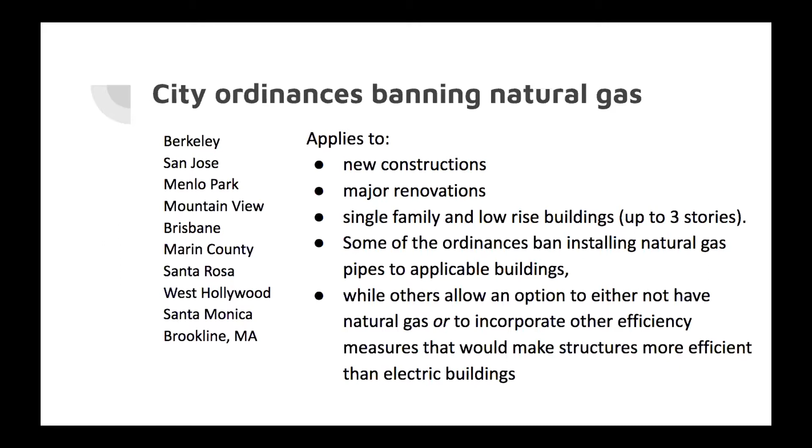So then looking at the challenges that these cities had when they were implementing their city ordinances, one challenge was restaurants, and just people enjoy their gas stoves. For a lot of people, cooking on a gas stove is really an important part of their home, or something that they cherish in their home.

And so while heating or cooking on gas stoves doesn't amount to a lot of greenhouse gas emissions in itself, there's a large fixed cost in setting up pipelines to new constructions. And once the fixed cost has already been paid for, it's cheaper to heat your house that way. And so even though stoves are a small part, it's turned out to be a large problem.

The California Restaurant Association sued the city of Berkeley, because Berkeley was one of the cities that had a ban on natural gas in new constructions, and the California Restaurant Association said that chefs wouldn't be able to make their specialties if they didn't have gas stoves, and a lot of people aren't ready to switch to electric stoves.

So that's one reason why perhaps a lower, more carbon-neutral alternative to natural gas might be better than switching to electric.

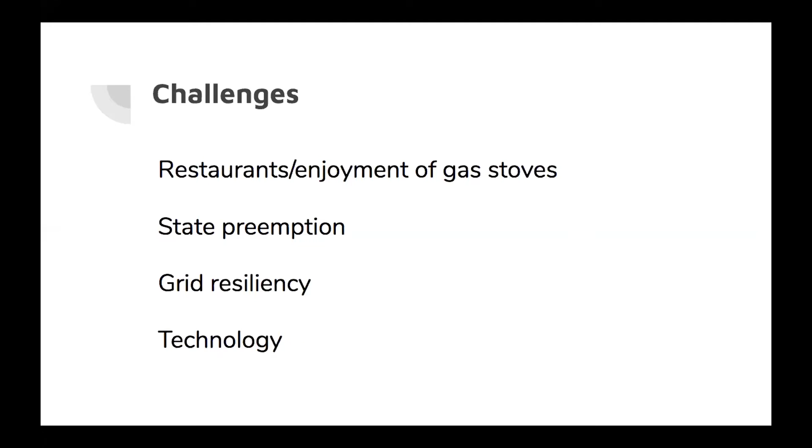So looking forward, those are the main challenges. And all 10 to 12 California cities have passed their ordinances and they haven't been challenged in court, so it seems like they are viable so far. And so the next question is, how can we advance these policies if our goal is to decarbonize by banning natural gas installations?

So one thing I think is pretty likely is these same 10 cities could expand these policies to include commercial and industrial buildings. And another option is these cities could expand these policies to include retrofitting old buildings or deconstructing pipelines that already go to old buildings. And I don't think that's as likely.

What these policies, I think, are trying to do is change the fleet of buildings for the next couple of decades, the next 50 years. And you don't have to spend money on deconstructing old buildings. That also means that there aren't stranded costs, which is something people get concerned with sometimes.

Another way that this policy could expand is if more cities ban natural gas. I also think that that's coming on the horizon. I forgot to mention, these 10 cities passed these policies last spring, and they came into effect in January 2020. So these are really new. I expect more cities will be banning natural gas and possibly on the horizon a state law, but that would be much in the future.

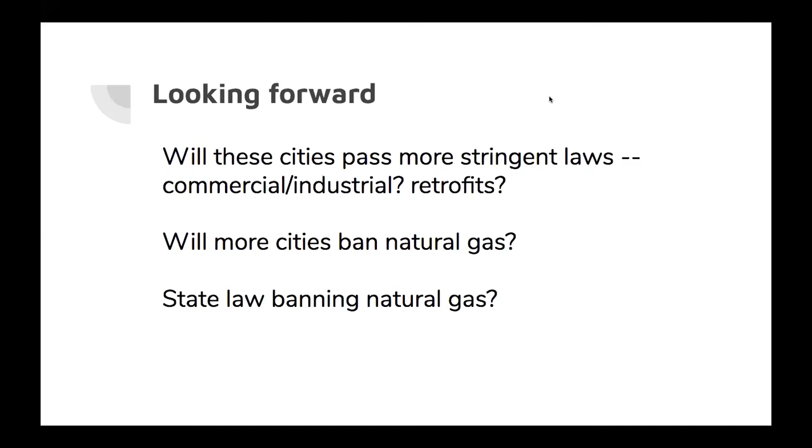So I think that's what I had planned to talk about. Does anyone have any questions now at this time?

So Rebecca, we have a question coming in from Greg, who's a graduate student here. It says the city of Davis does have a natural gas ban for new single-family residential buildings in place in the form of a REACH code, forcing mixed fuel buildings to be so efficient that it would not be cost effective compared to all electric. This went into effect in January 2020. So I think that's just adding to the list.

Oh, right. Yeah, I had not classified that as a ban on natural gas because it was a REACH code. But you could classify that as banning natural gas. I mean, I think there are about 20 or 30 that have REACH codes.

All right, any other questions for Rebecca? We can move on to Erfan, and if there's a question that pops up, we can head back to Rebecca at the end. Oh, we have another comment here. Teresa has a question, and I'll just go ahead and unmute her so she can ask that to you directly. Let's find her. Here you go, Teresa. All right, you're on. Yay, I get to talk. I thought that'd be easier than typing. Yeah, no worries. So I just had a few observations.

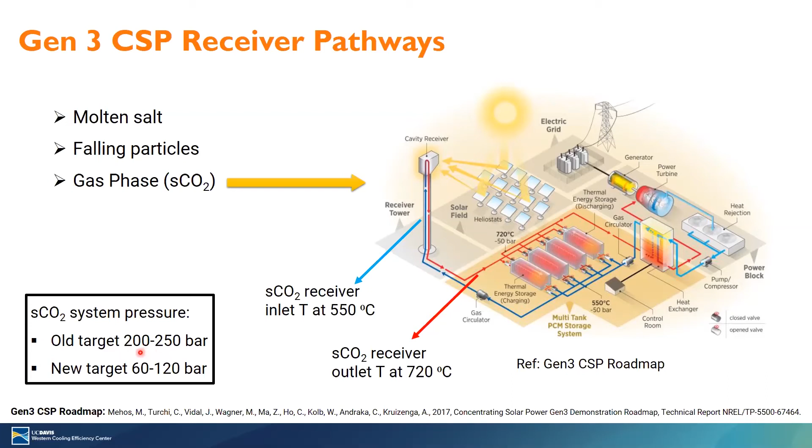And other than the temperature, the pressure of interest when we started this project was about 200 bar, or about 3000 psi. For this gaseous pathway, there were different contributors. One of them was Oregon State University. At that time, we at Oregon State University presented a concept of using microchannel technology.

I'm not going through the details of microchannel technology, but just imagine these are very tiny flow passages that the fluid passes through, but still large enough to efficiently transfer the heat from the incident heat flux into the fluid without wasting space, because we have a packed area on top of that tower.

So this shows a sample of one of those small unit cells in the microchannels. These unit cells stick together to form a panel on the right, and the bottom shows these meter-by-meter panels with some fluidic piping on the back, sitting next to each other to form that tower. That represents the concept that we suggested at that time.

So definitely we started with some simulations and modeling to see whether microchannel technology is able to provide high efficiency heat absorption into the fluid or not. I don't have much of the details here, but just referring to the term efficiency: it has been defined as the heat that goes into the fluid divided by the heat that comes into the receiver.

Most of the incident heat that comes in goes into the fluid, but part of it gets reflected, and a fraction of it forms the heat losses as radiation and convection losses. Our interest is a higher Q fluid, so we have a higher efficiency. Our modeling at that time showed that we can have more than 90% efficiency in the range of heat fluxes that is the goal of the project.

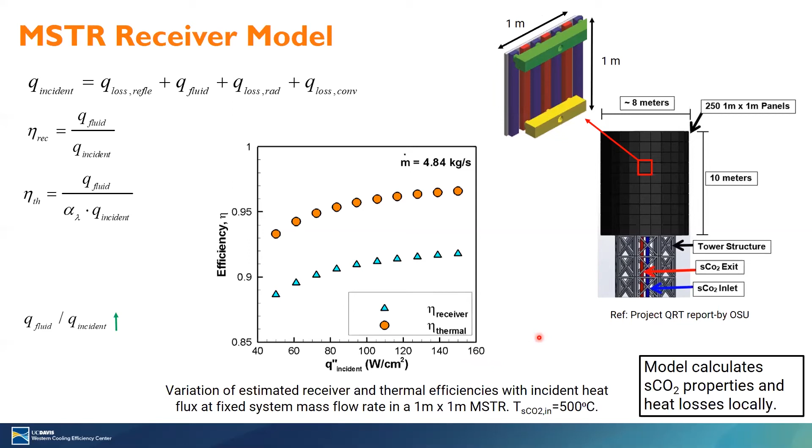So it was a 2-3 year project. We started with the proof of concept with very small samples, even as small as 1 centimeter by 1 centimeter microchannels. We proved the concept. At the end of the 3rd year, we fabricated 1 microchannel, which is combined of 2 unit cells that had overall dimensions of 8 centimeter by 8 centimeter.

The picture on the left shows the exploded view of how that microchannel receiver looks. So there are different layers. Each of them has different channels in it. These layers sit on top of each other and go through the diffusion bonding process. There are some details here, like some interface coatings that should happen in order to have a good bond. But eventually, these get pressed at high temperature, and over a certain duration of time, these interfaces melt together, and we have our one-piece receiver.

This picture in the middle shows how the fluid looks inside these cavities. The fluid comes from one header to this 8x8. It splits in 2 halves, goes to the top and the bottom, goes through some side channels, and feeds the greenish plate that sees the incident heat flux. Then it heats up, collects in the central, I call it pipe, and then exits the microchannel.

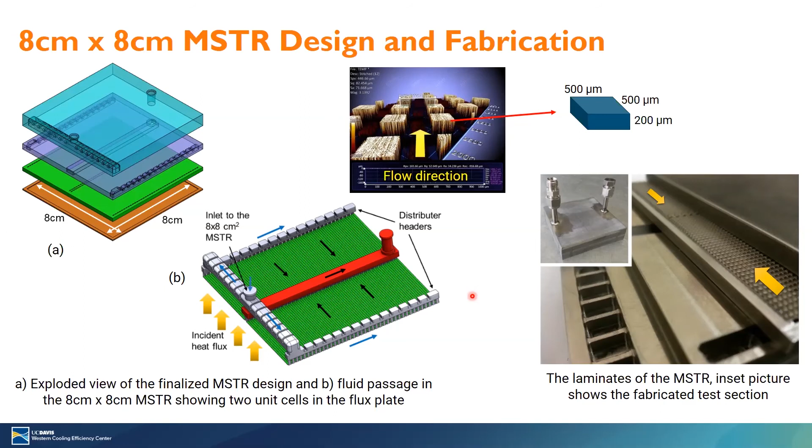The inset picture on the right shows how that 8x8 receiver looks, with just 2 pieces of tubing sticking out, and some of the layers before diffusion bonding. So at the end of that project, we had this test article in our hand, and this became a good sacrifice to use to move into the next phase, because the next phase was to make test articles bigger in size, 15 centimeter by 15 centimeter, and also tested on sun.

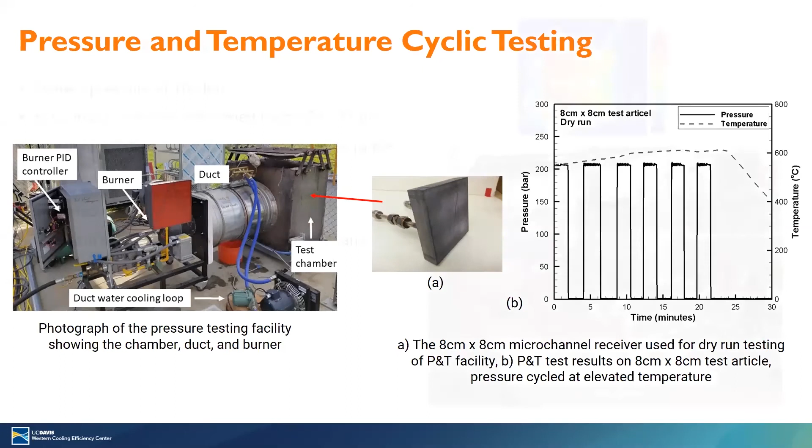One other test we had to do with the equipment prior to on-sun testing was flow distribution. So again, maybe it's not clear, but the test article is sitting here. We have an IR camera in front of it, and we send very hot flow inside the microchannel, and then we use the IR to see, in a fraction of a minute, maybe 10, 20 seconds, what the temperature profile is going to be on the outside.

If we have a uniform temperature distribution, at least that's an indication that the flow is uniformly flowing through the channels. Of course, there were a bunch of simulations to make sure we have uniformity of the flow. But again, we have to validate it by these experiments. We used that 8x8 for this experiment as well.

This top bluish and reddish image shows the IR picture of that test article in a transient condition. The arrows show the fluid comes from the left, goes to the sides, and from the sides it goes inside the unit cells, from the top to the middle and bottom to the middle, and goes out. In this 8x8, we see that some sections are not showing good flow distribution; it doesn't show uniformity of the temperature here.

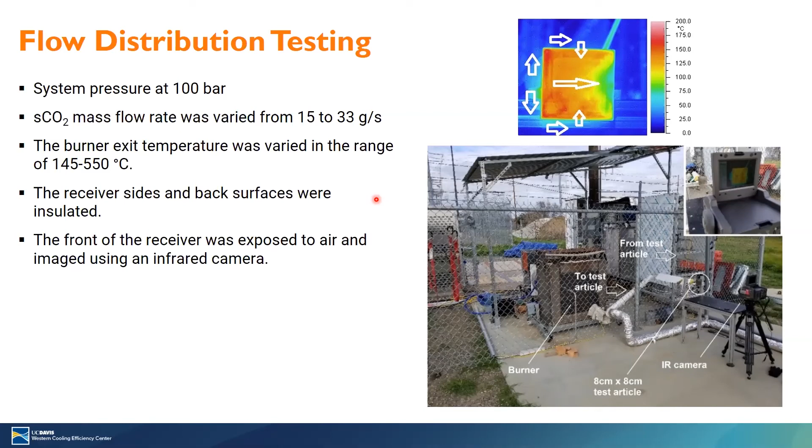That's one indication that, at least for that test article, we don't have good flow distribution. But since the purpose of these experiments was just to use this test article to validate all of the components, we moved forward. So the next couple of slides show a simplified sketch of what our test facility looks like.

This greenish box here is actually a container that we have a frame inside. This frame holds a pump for the CO2, a reservoir, a bunch of the fluidic lines, a bunch of the valves, control valves, pressure regulators, and the picture of this frame is shown on the right. Then we use this frame to push the liquid CO2 into the system.

Before sending this CO2 up to the receiver, we have a section where we use that propane burner and that chamber that we use for the pressure and temperature testing. It's a dual use for us. We use it here to preheat the flow, because, as I showed in earlier slides, the goal is that we increase the temperature to 500 degrees C before reaching the receiver. So we use this preheating section to preheat the flow.

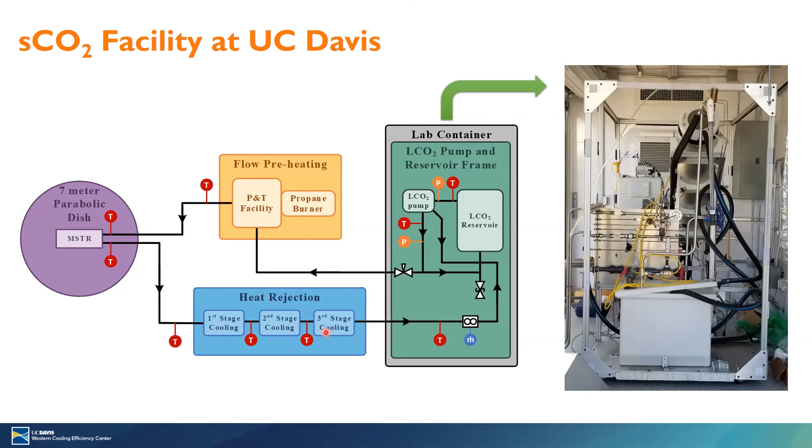And then once it's preheated, it goes into the solar dish, and from the solar dish, once it's heated further, it comes down to a series of heat rejections. We call it first stage, second stage, and third stage before going back to this frame.

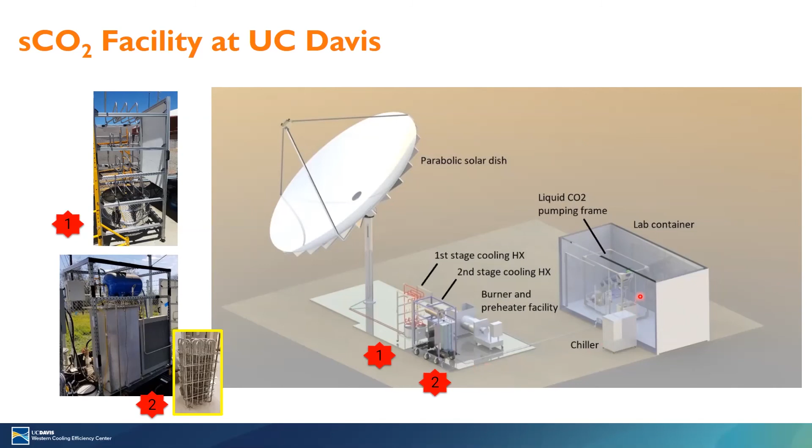Next slide shows another 3D view of our solar site. That container with the frame inside, the preheater section here, the solar dish that we assembled here, and that microchannel receiver is gonna sit on top here. It comes down, and these are a series of those heat exchangers that we have. And we have to make sure that the CO2 is back to liquid and goes to the container, to the reservoir.

Next slide shows our solar facility at work. So we installed that 8x8 receiver on top of the focal point. Then we started tracking the sun. So in this glowing part, we don't see that 8x8, which is dark color, because it's just all sun concentrated there, and it's just glowing.

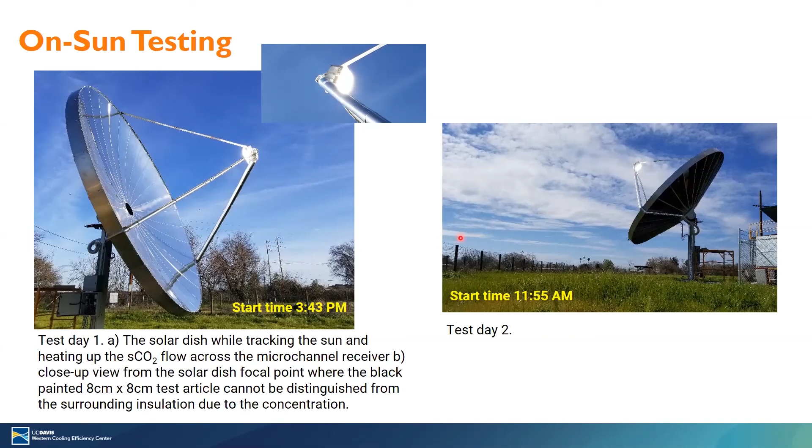And so we ran these experiments in 2 days. The first day was further in the afternoon, about 3 p.m. The other one was right at noon. And also you see that the sky had different conditions of the clouds. So in the first day, we had much more clear sky than the second day. I'm referring to these clouds because in the next slide, I'm showing the transient temperature and pressure changes over the time.

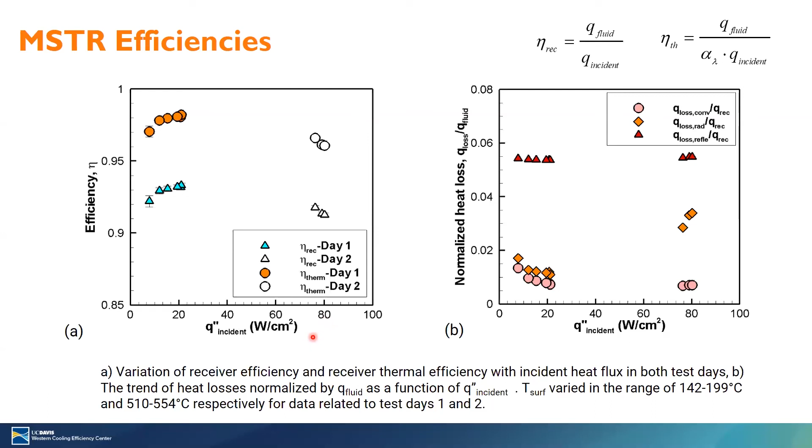So Erfan, we have just a few more minutes. Just a few more minutes before questions. Sure. Okay. So it's almost done.

Then we sent it to our partners at NETL in Albany, Oregon, so they cut it in sections to see what the failure reason was. I'm not discussing this, but one of the difficulties people are dealing with in diffusion bonding is getting a good bond.

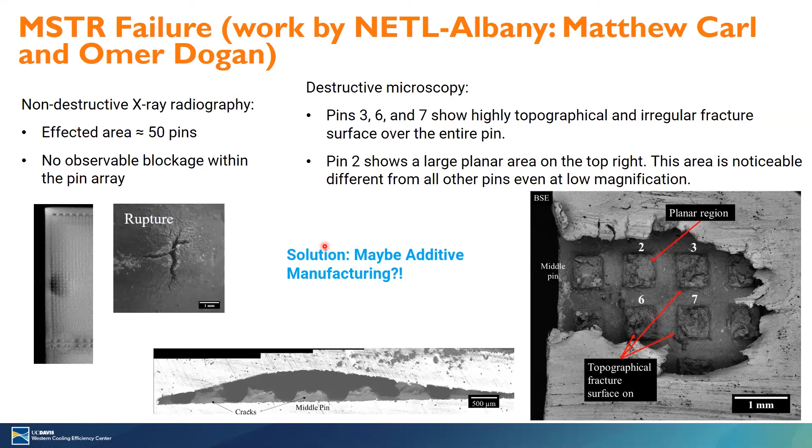We can't always guarantee that we have a perfect bonding for all of these features. Thus, we found some sections that apparently during the diffusion bonding were not melted and there wasn't really a good bond, and maybe one pin caused the whole system to fail.

So we had some further developments at our site in 2019, and even now we reinforced or updated our installation of the pipings, because we saw through those experiments that we cannot have that much high temperature of 500 C on top of the dish. So we had to update all of our installation in one line.

Also, one of the things we saw is that in our preheater we couldn't reach the higher temperatures we were expecting. So we had to make a new preheating core that sits inside that chamber to heat up the test. For one of the upcoming tests, our partners at Oregon State are in charge of designing and fabricating the 15 by 15 centimeter test article.

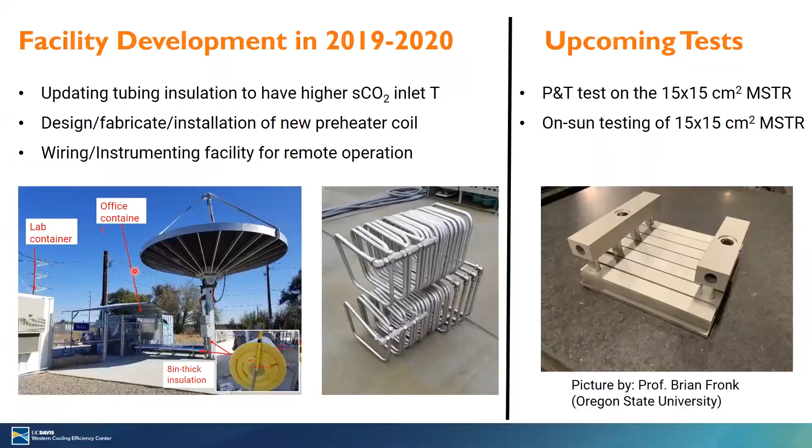This picture shows one of the articles that they made. Once they do some proof testing and static testing, they're going to send it to us and then we do our experiments here. This concludes my presentation for today.

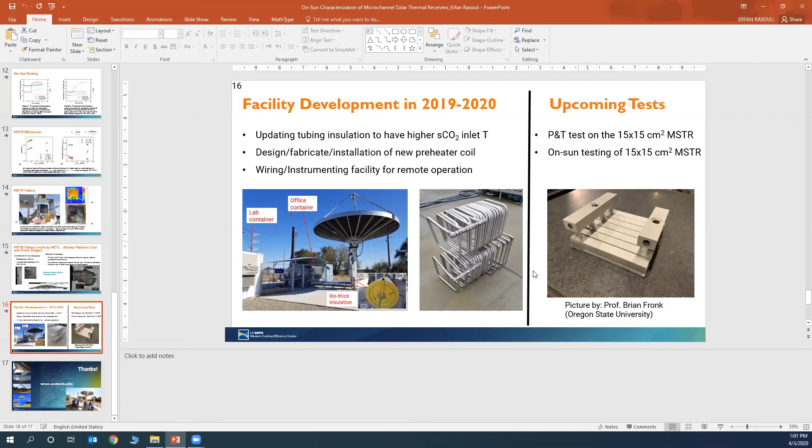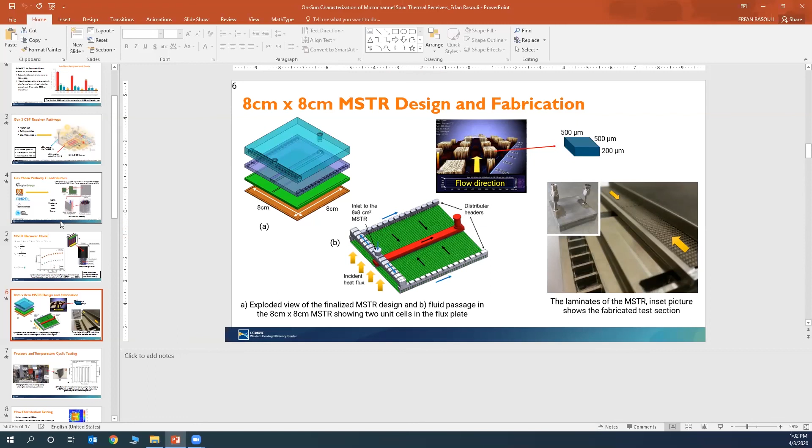But when we talk about the larger scale, in order to hold that pressure we need a lot of thickness. For tubes, for example, we would need maybe 1/8 or 1/4 inch thickness to hold that 200 bar pressure. But once we go to microchannels, the channels are smaller, and based on the supports needed, we are talking about thicknesses of maybe 0.5 millimeter or 1 millimeter. So all of those wall thicknesses become much smaller.

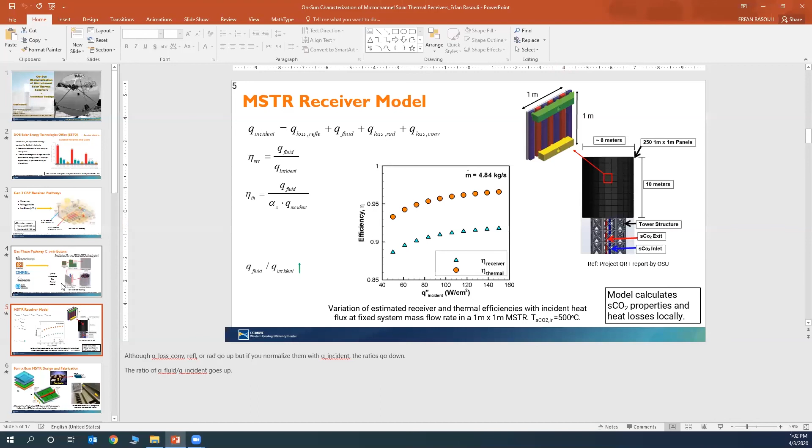So at last, we ended up having much lower weight panels than if we had a bunch of inch-size piping in that tower. But there is definitely a cost analysis going on, because, as I mentioned in the first slide, they are very cautious about the cost. Our partners at Oregon State University are doing that section, which I don't have knowledge of. But I wanted to add that from the microchannel perspective, we are reducing the amount of material used in the receivers.